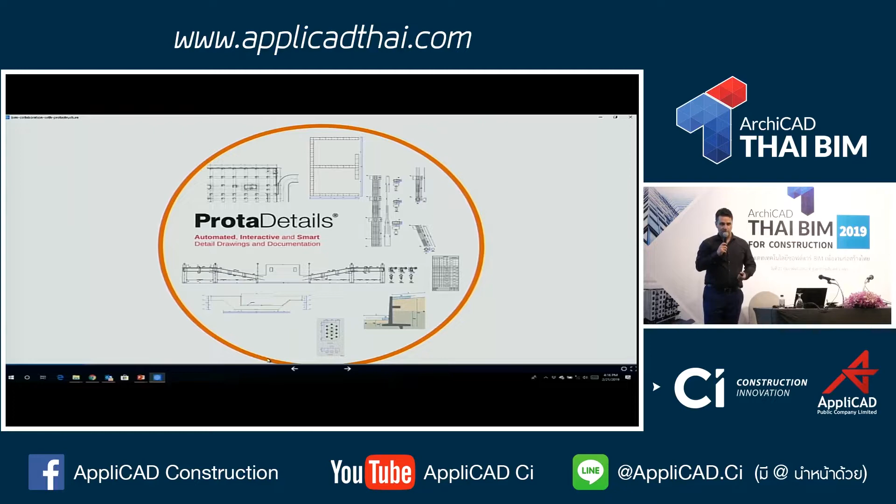Now, Prota Details works in DWG, but you can publish to other recognised CAD formats. We recognise that steelwork is a little bit different, which is why we've also created something dedicated for dealing with steelwork detailing, which is Prota Steel.

So the idea with Prota Steel is that once you've designed the structure in Prota Structure, you send it to Prota Steel. We can then automate the connection design and start to produce all the steelwork detailing, right down to connection details.

Now, let's not forget BIM, and I know that BIM's a very hot topic around the world, and we communicate our models directly with other leading platforms, including systems like Revit and ArchiCAD.

To do that, we have things like bidirectional round tripping, and we can take models back and forward to manage the process of changes and refinement to the models as you move them from design to construction.

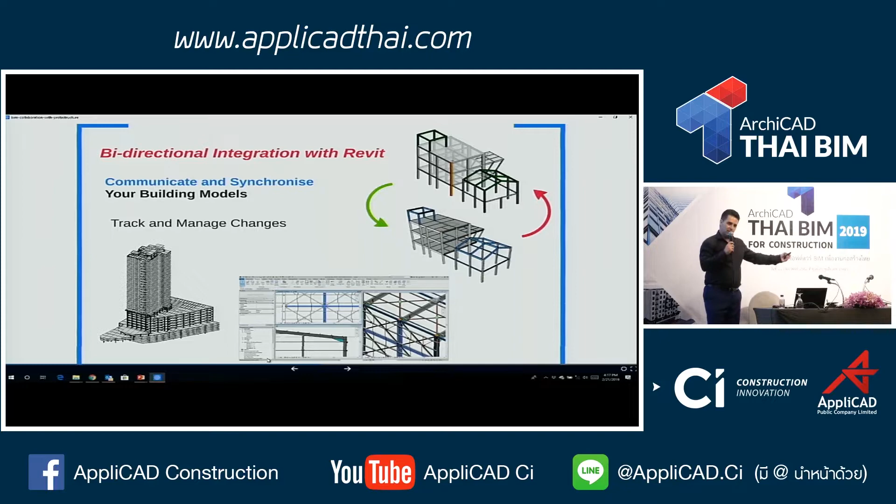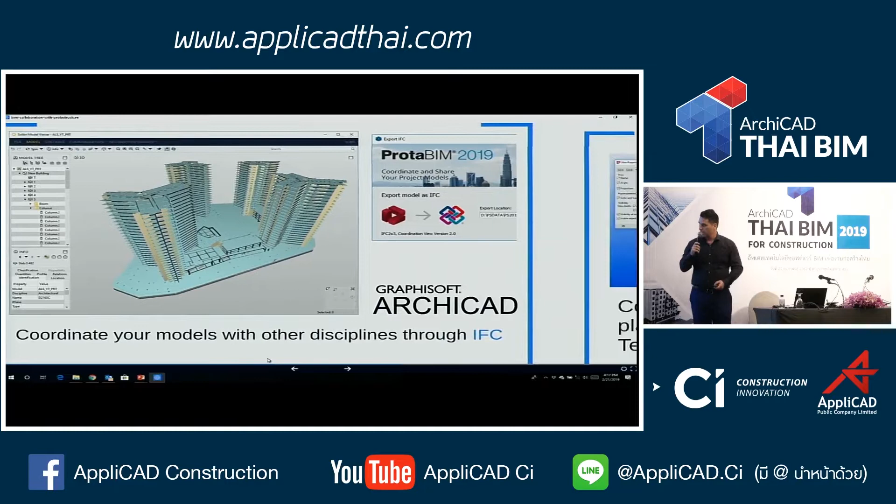We support a range of different formats, so if you're wanting to use IFCs, for example, we can publish those directly into ArchiCAD. We do work with other platforms like Tekla, ProSteel.

We can even go down to shop drawing production, and NC files and so on can be generated from our systems to feed fabrication.

Now, we're very open, so we make it easy for you to share information with other platforms, including general analysis systems like SAP, ETABS and LUSAS. So if you want to cross-check models from Prota Structure, we make those available to you, and you can easily cross-check results from our systems with other recognised platforms.

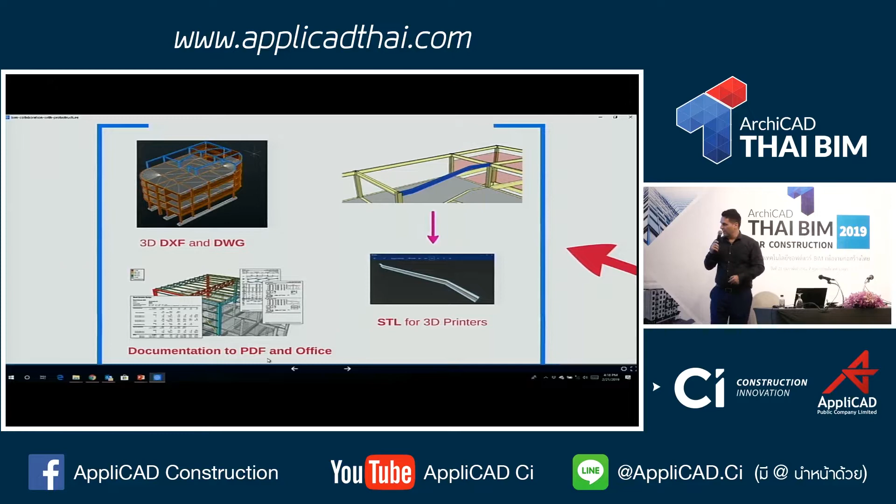Now, there's other formats as well that you would need to produce as an engineer. Obviously, things like calculation documentation. All the design that comes out of our system is fully documented, and all the detailed calculations are produced. You can also provide other formats like 3D DXFs, even down to STL files for printing.

Okay, so this gives you an overview of our system. Now, what I'm going to do at this point is sit down—you'll have to excuse me—and I'm actually going to show you how it works. I'm going to take you through a simple model to give you an idea of what we do at Prota.

Can you hear me? Is it clear?

So what I'm going to do here is take you through how the software works, and to do that I'm just going to build up a simple model. When you start Prota Structure, if you're new to it, there are quick start guides, YouTube videos, and tools in here to help you get up and running with the software quickly. Now we have regular updates to the software and they're all documented.

Now what I'm going to do here is create a simple model. To do that, we'll just give this a name, so I might call this a Bangkok presentation. We have studied different markets around the world, and we've got different templates here that you can load. So for Thailand, you're typically using the American codes here, and you can load these templates which will customize the way in which the design and the detailing is prepared.

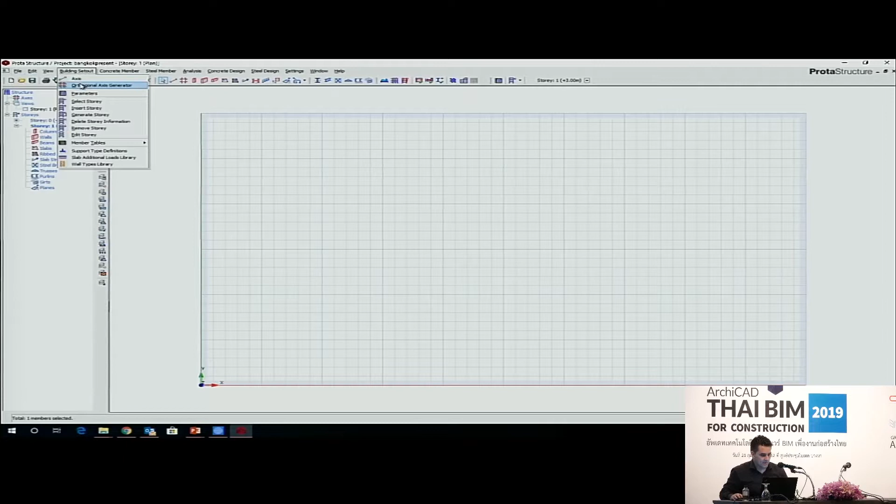I'm just going to create something simple here to give you an idea of how this works. So I'm going to key in a basic grid line arrangement, and maybe a few axes here, and if I just hit OK, you can see that some grid lines have been set up. Now these grid lines are dynamic, and we use these to help us with the set out. So what you're going to see as I go is that this starts to look like a key plan.

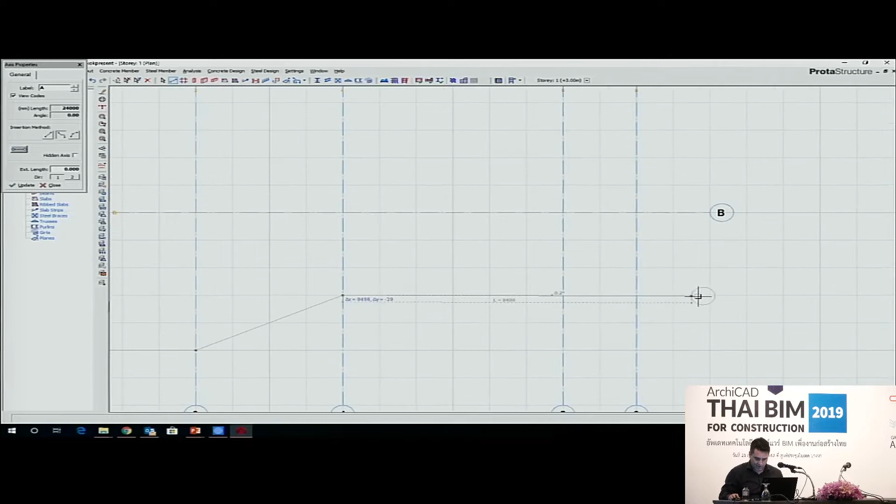But the grid lines are dynamic, you can make changes to them. If you want to make a curved axis, for example, or maybe you've got a building where the facade's a little bit different and you want to set things out differently, you can just come in here and draw out what you want. Any funny arrangement you can create here, and use those grid lines for set out.

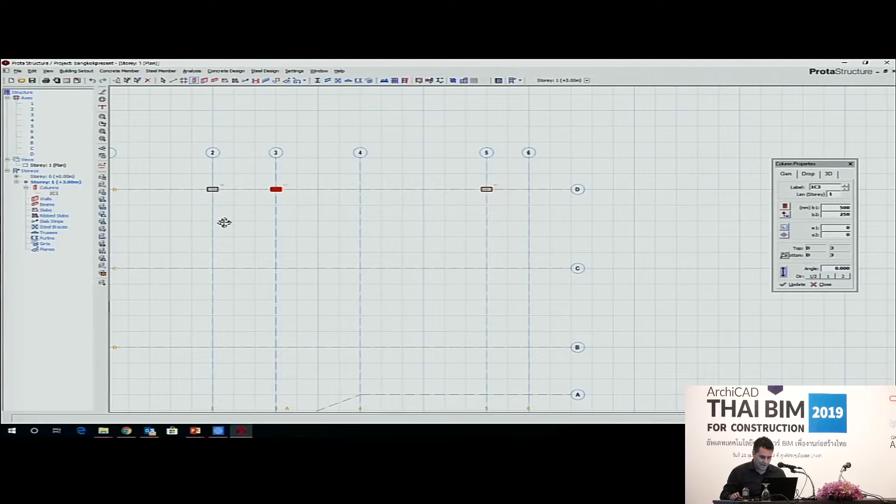Now I'm going to work with physical objects, and you'll see here that I have selected a column, and you can see the preview of the column shape. So if I want to create that column, I can just click to put it in. If I have multiple columns that are the same, I can just click and box around. If I want to change the orientation of the column, maybe I'd like it in a different direction, I can just box around and create those quickly.

There are other objects that you can work with in here. You can work with different concrete or steel or built-up sections, cold form sections, even composite sections, you can create in the model here quickly. If I want to maybe put in a couple more columns down the bottom here, maybe I've got another one there, I can just quickly set those up.

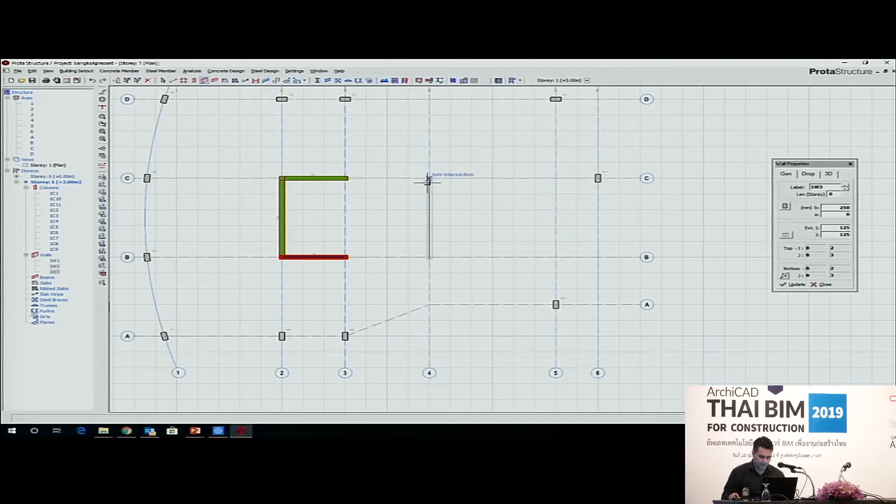Now I'm going to move in and put some walls in. I'm just clicking to create these walls. At the same time, I'm also going to create some beams.

Now you can play with the properties of the beams here. You can feed in the depth of the members. You can box around to put these in, and you can start to see that I'm now starting to create the shape. Even if it cranks and follows the curvature of that beam, that grid line, maybe I want to put in a curved member. The idea is that I can just quickly come in and create the structure.

Now if you have lots of members in an area, you can just simply box around and they'll be created there. If I've got members through, we understand that these members already exist, so there's no overlapping, there's no double counting. It's just putting those two extra members in.

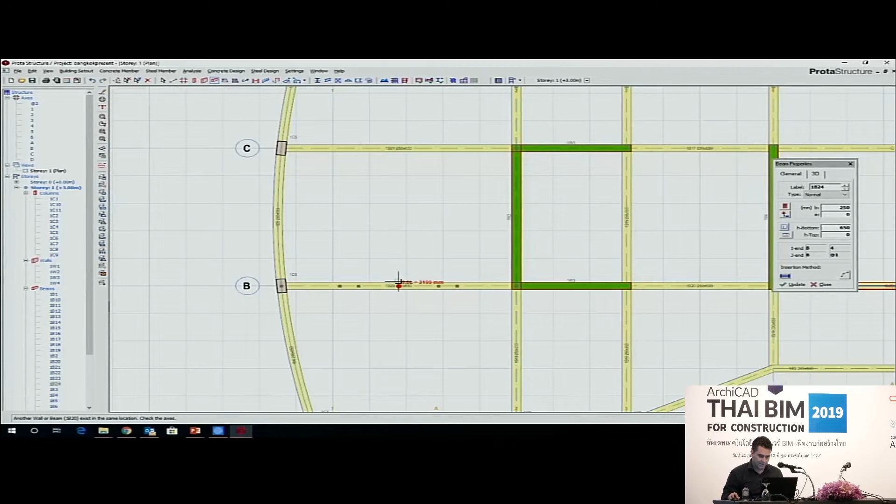Secondary beams you can just easily select and put members in very quickly. Now if you have certain set out, you can just key in a distance, and then it will pick that point up and you get handy points like the perpendicular. You can move these around to then adjust it to suit the architecture.

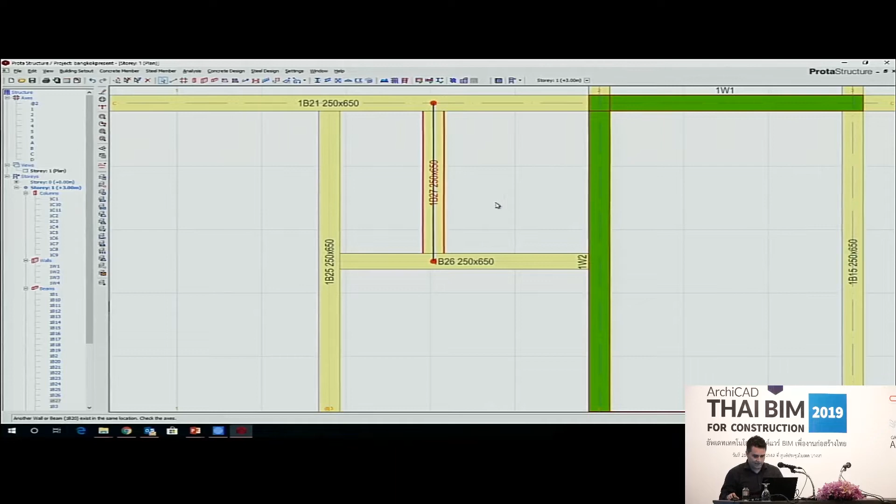So if I wanted to move it either way or just move it roughly into position, I can. It could be a single element. Maybe over here you'll see that I've got a number of columns that are just jutting out from the facade, and I may just want to pick these up and move them. So you can easily just adapt the model to suit what we want to create.

Now, at this point, I'm going to put some slabs in. Let's just assume that the slab is 200 thick. Now, the self-weight's calculated. You can have libraries of different finishes that you can draw upon. For live loading, if you're not sure, the code is in here, so you can just choose from different values in the code, and then quickly come and insert and create your slabs.

Now, you can edit these. These values are editable. You can just type in the loading values that you want to use. They can be whatever values you wish, and you can just quickly come and create the slabs there. Maybe that's 3, and you can put that in.

Now, what you might see here is that we're automatically working out the yield line for that slab. So underneath this, even as we speak, all the loading's automatically being distributed.

Can't hear. Okay, sorry, all right, I'll get this a bit closer. Is that better? Okay, all right.

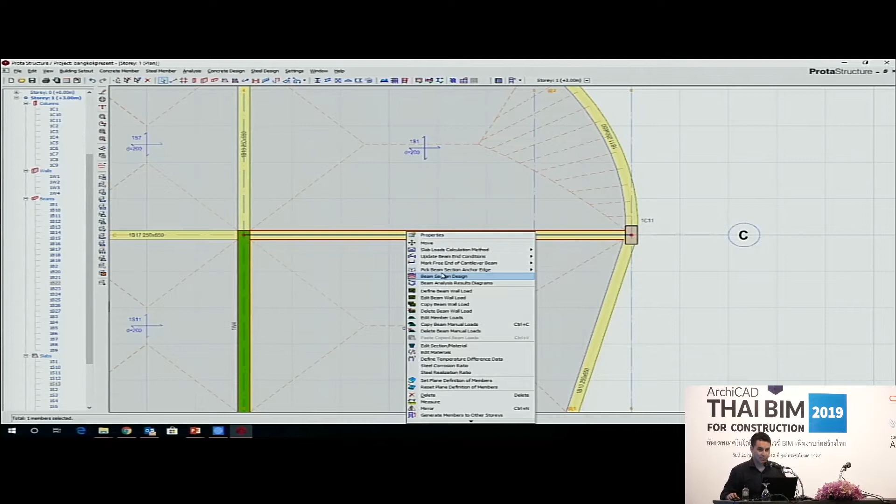So what you might see here is that I've got the distribution of dead and live loads automatically being carried out as we speak. So all this is handled automatically. You can use finite element analysis to distribute loads if you wish. Now you can have different types of objects in here.

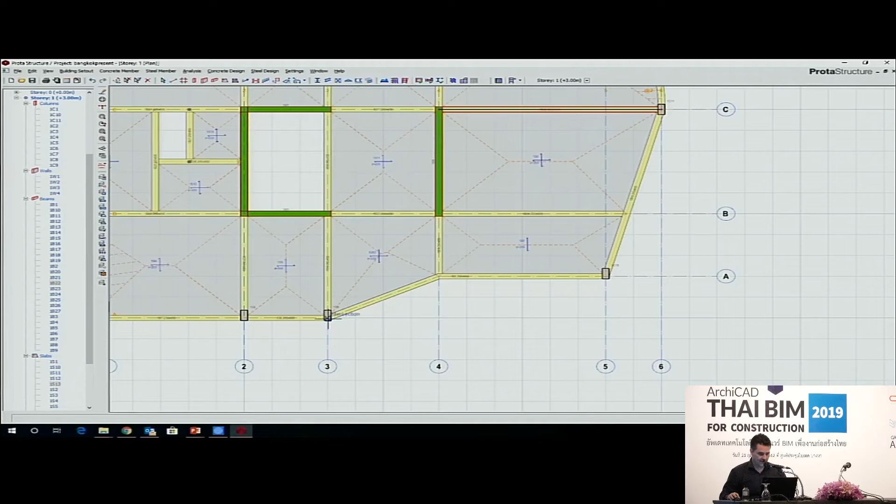So if I wanted to create a slab which is a bit different, we can draw out the profile of what we would like to create, then take another slab and come and create this. So I might have a slab that's maybe only 150 thick, and I want to drop the slab 100 millimeters. I may want to just change the way in which this is orientated in the model. So these things can be controlled, and then we can use that profile to help us create that unusual balcony.

Now, what you might not realise is that while I've been building this model, we've actually been creating simultaneously a 3D model. This is the underlying 3D model that has been driven from us working out that set out, and you can work in both 2D as well as 3D in the system.

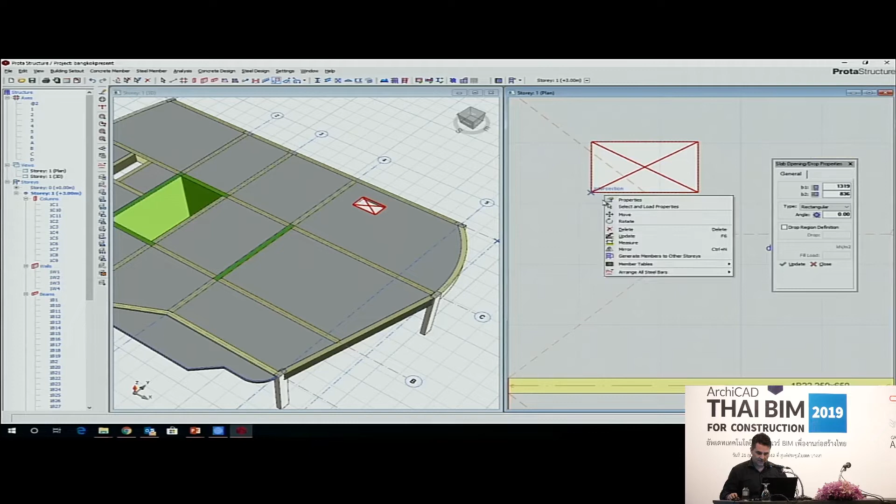And the beauty of it too is that you can lay out other things, like maybe you've got things like openings in the model you wanted to have for services. The advantage with the 3D model is that if I got that position wrong, I can just pick up the opening and move it.

There may be other things that you want to set out. You may have unusual drops and so on in the slab. Maybe you have a bathroom and you've got a set down. So in here I can just draw that out, and you can see that that's been created in the model.

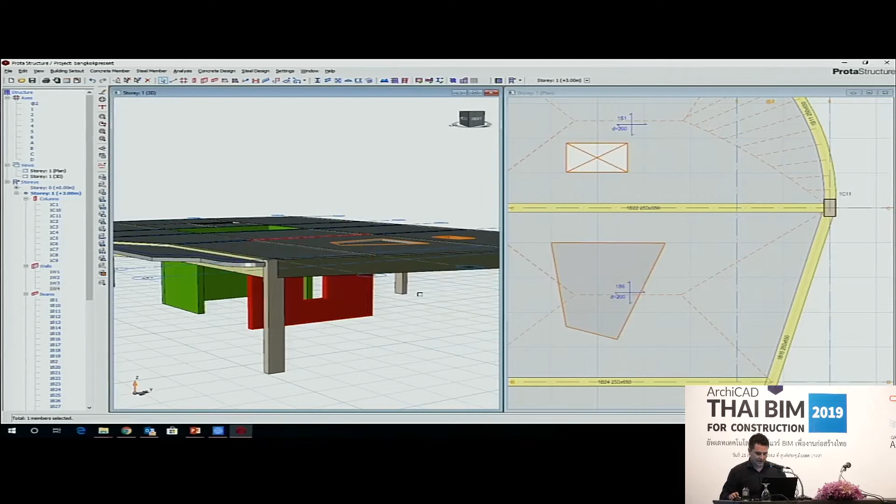Other things like maybe if I come and select this wall here, we may like to include, say, a door opening or something like that. So I can come and put in openings in here. You can key in parameters for say a door, for example, and you can position it where you like. If you hit OK, then that door's created and that opening's then created in the model.

The idea is that you can very quickly come and set these out. If you have other things you want to put in, like wall loading for beams, you can have libraries for different types of block work, key in the value of the wall loading, and that will be created on the beam.

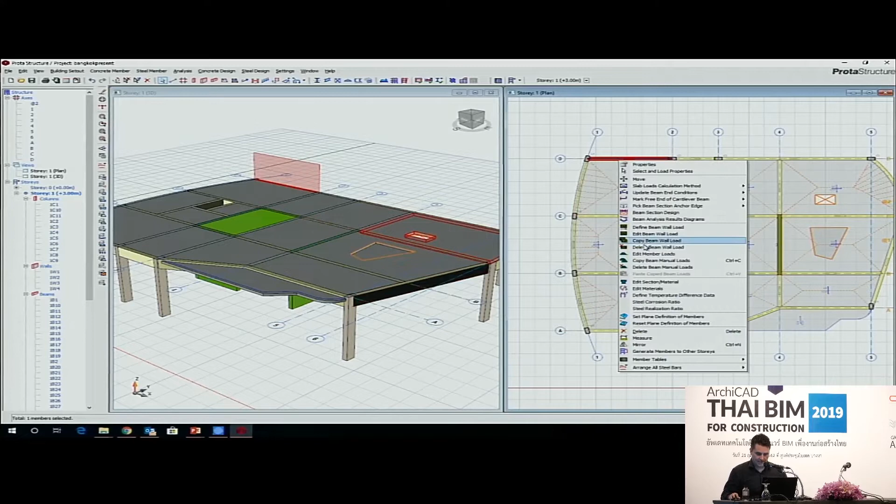These can easily be copied and replicated around the model. So if I wanted to quickly set up the wall loading around the perimeter of that building, we can just copy and paste that, and you can see those loads have been quickly set out.

At this point, I'm going to start to generate information. This might be a typical floor - maybe this is a 5-story high building. I can take this floor and copy it up the model, hit OK, and you can see this 3D model is now starting to be prepared.

This I can work with in 3D - it's editable, and if I want to make changes as I go, I can. Maybe there are other types of structural systems we want to consider.

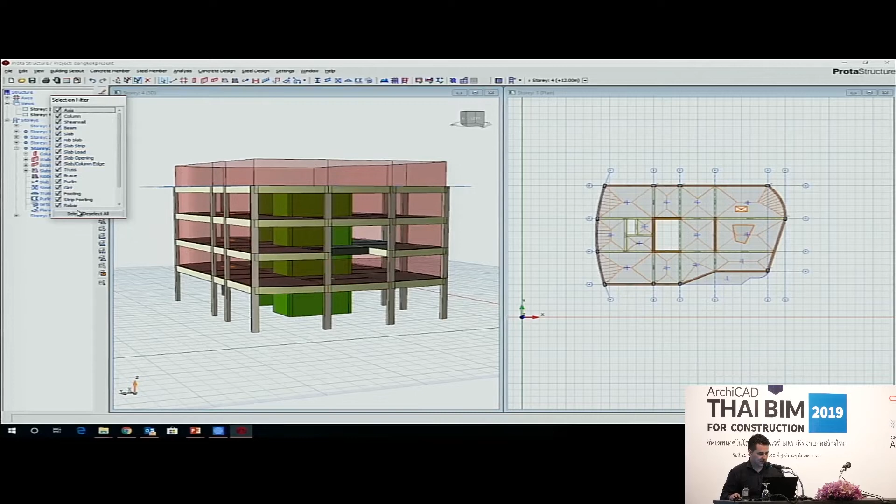I may select the beams at the roof and actually remove them, so now I'm just left with a flat slab system at the roof. We can easily come and adapt the model to suit.

If you want to make other changes, you can. So if I decided I wanted to remove the wall there, I could take that out. Over here at the moment I've got a column - maybe I'd like to make it a square column. We could just come and change the properties here to suit.

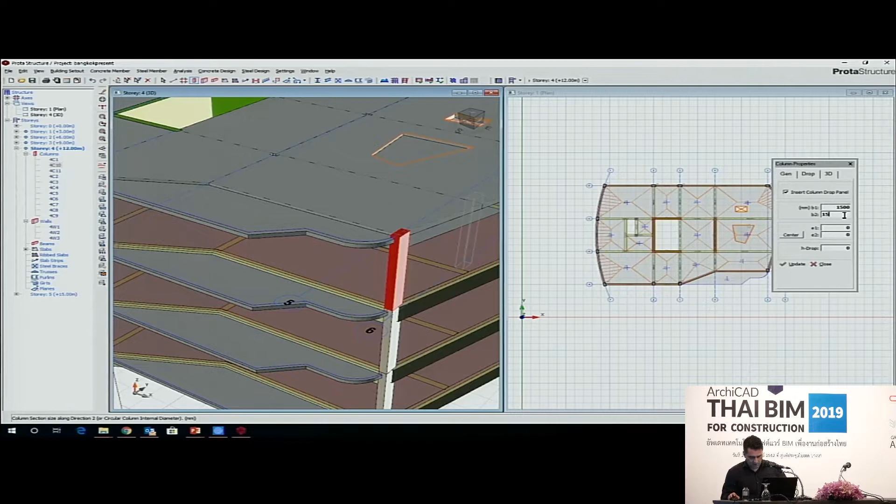I might want this to be centroid, and then I could come and insert a drop head panel. You've got different types of elements to work with to suit what you're trying to achieve in the structure. If I reposition that in the model, you can see now we've got a drop head panel for the flat slab.

It just depends on what you're wanting to do as to how you might go about creating this. Now let's go to the roof and start to work with some steel work. If you click on the model, you've got different section properties to choose from - maybe put in a column as a starting point, then choose a section you'd like to work with, and start to develop this.

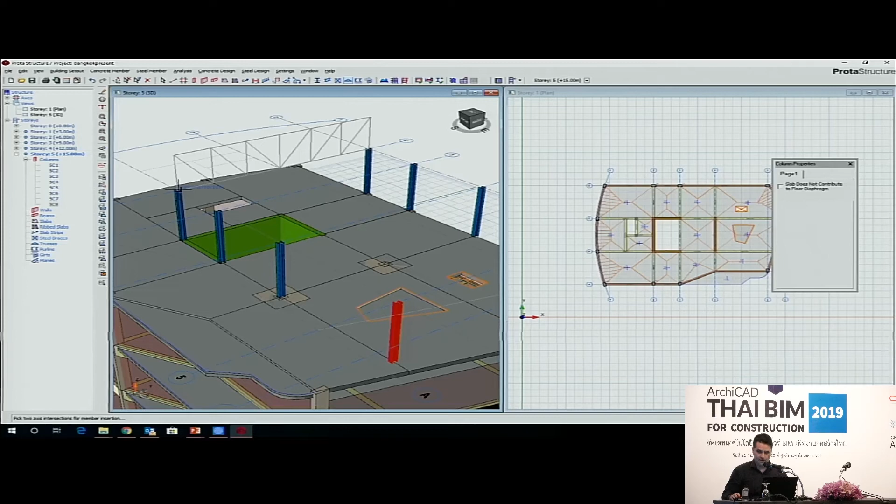I'm just putting in some columns there, quickly set out. If you then want to create a truss, I can just quickly insert the truss - you've got different types of truss systems to choose from. This is all flexible, set out and controlled here, and you've got a little 3D model you can preview.

What you can do is start to work with this. So if I wanted to change, maybe I want back-to-back angles for my internals, or maybe I'd like to use tubular sections or so on - all this can be edited to suit.

Now I'm going to remove the two verticals there and place this in the model. So you see that truss has now been set up, and we can work with that truss, and quickly replicate it across the building.

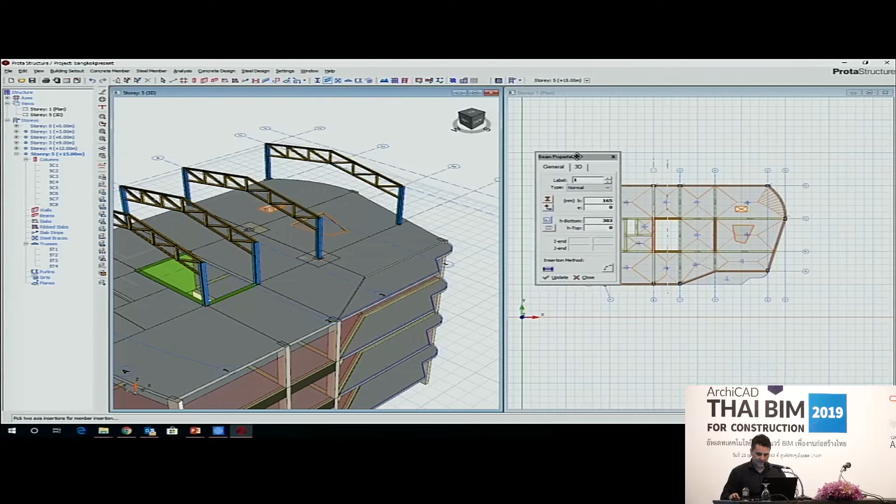Now I may also want, at the same time - let me just close this window so you can see what I'm doing - to come in and put in a beam, so it could be a UB, and we can just choose a size as a starting point.

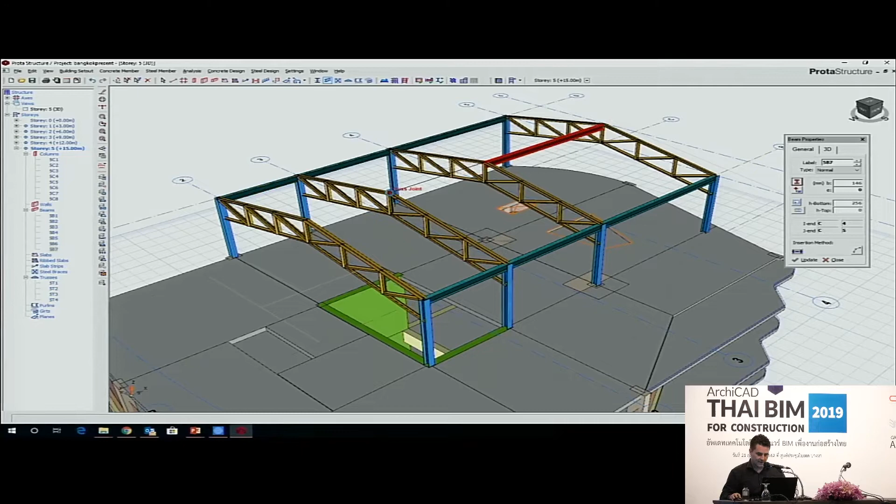I'm going to pin the ends of those beams, and set out those members across the perimeter to tie those frames together. I'm going to connect the apex here - these are intelligent snap points, so you can snap to virtually anywhere, but let's just tie those tops together.

Now, laying out things like purlins can be a bit of a challenge. So here you can just choose the end bays, and it will propose a purlin arrangement. If you want to change this, maybe put in a cold form section, or a normal hot rolled steel section, you can choose from different sections here. I'll just edit that again.

So maybe I want to choose a bigger section, we can come and select that. Now you can also assign, you've got sag rods in there that we've provided. If you want to remove them, they don't need to be there, it's up to you.

You can also add loading, so I may have my cladding that I'd like to set up in here. We can then come and assign that to the model, and you can see the loading's been automatically distributed to the purlins. If I hit OK, our purlins are just set up.

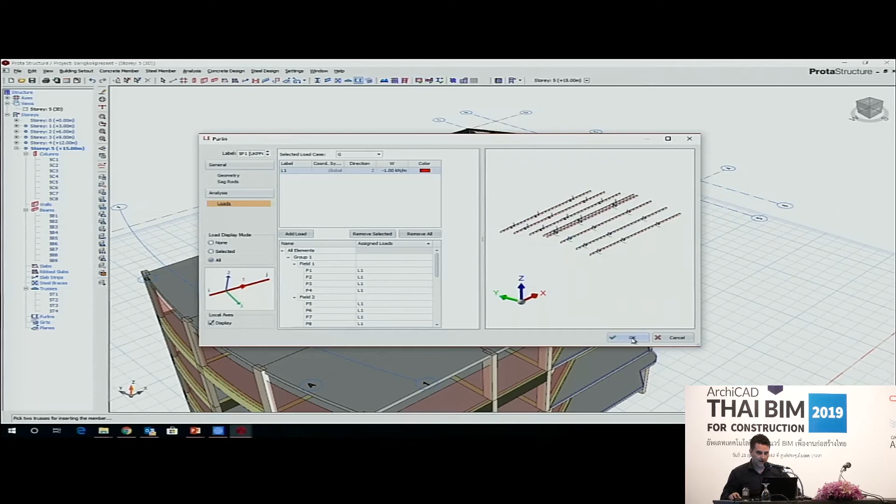The final thing I'm going to do here is put in a bit of bracing. So we can just choose a couple of planes, and there's different types of braces you can choose from here, V brace, K braces and so on. If you just hit OK, the brace is created. So you can see here, very quickly, I'm working with the physical model to create our design model. Let's just come and pick that up, and we've got our bracing system done.

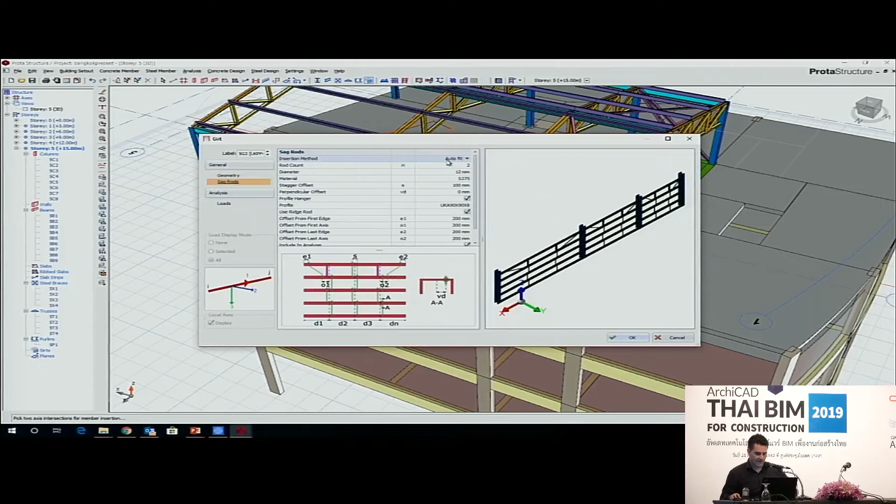The last thing I'll do to finish this model off is define some girts. So I can choose two end columns there, and it will propose a girt arrangement. You can play with the spacing of these. Again, if I don't want to see the sag rods, I could turn those off if I don't want them in the model, and then they can be created there.

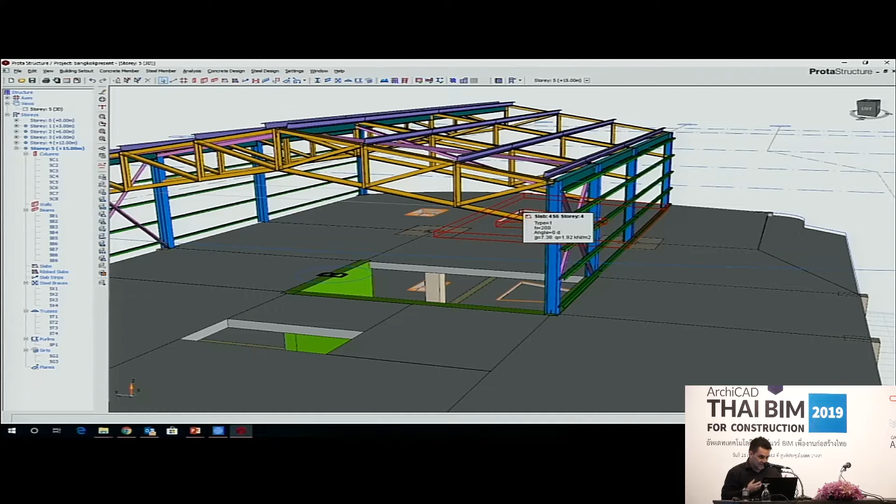Now the important thing to note with what I've done here is that we're setting out everything physically as if you might build it. That's very important, because from this model we're now going to start moving into design, and then we're going to start creating drawings. So we set out the physical model to create what it is we want to actually draw at the end of the day. So I've done a basic model.

Let's move into looking at the analysis and design. I'm just going to save this project, and then we can move through the design process. Give me a second, let's grab some water.

So in the software here, there are different parameters that you can choose. There are different codes of practice, as I mentioned earlier. If you're doing projects elsewhere, you may want to design to Eurocode or British standards or other codes of practice. You can just choose from here. We've set this up to suit how you do things here in Thailand.

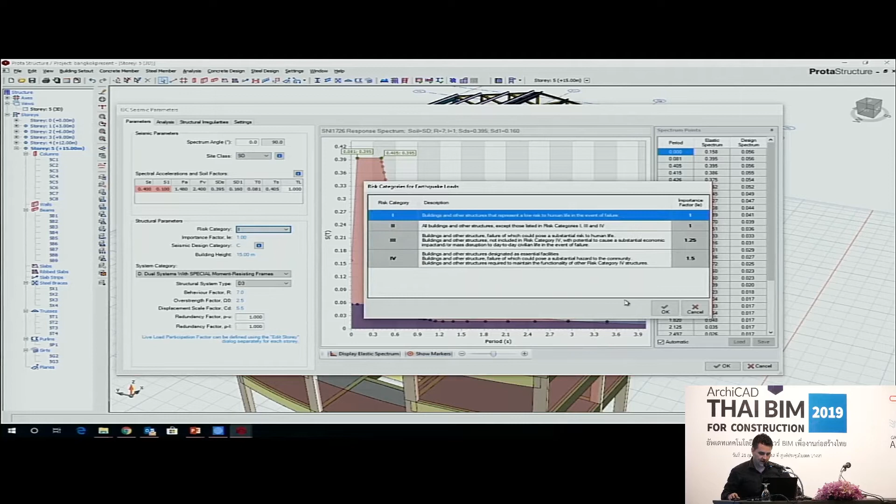You can also come and define your seismic parameters here. In Bangkok, I understand you're on medium soil, so you'd choose the soil class for setting up your seismic loading. You can choose different risk categories for your building structures. You can also come and define different structural systems, so I might have an intermediate moment resisting frame, or it could be ordinary RC walls. It will adapt the spectral curve and design accordingly.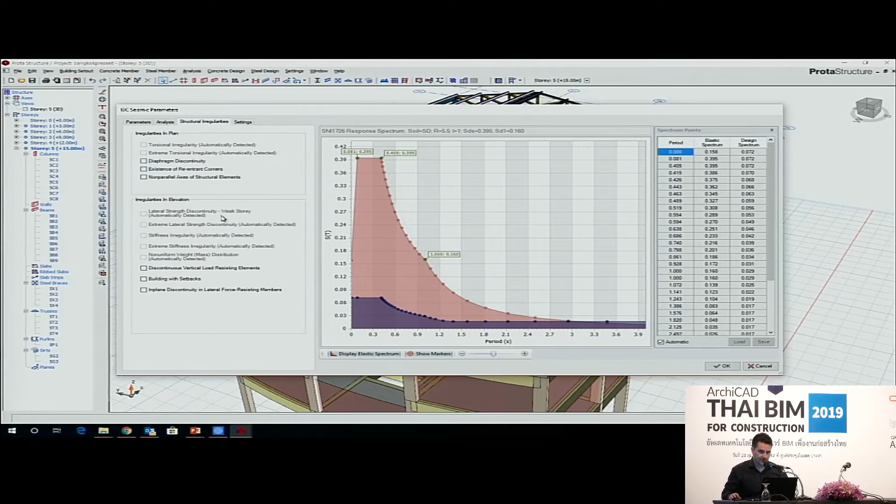You can play with the number of modes that you can consider. We also can check for irregularities. There's some quite sophisticated things that we do here with the seismic design.

Load combinations can be difficult, but in here we actually set these up for you. So all the pattern loading, stage construction analysis we can run. Lateral cases for seismic can be established here, and you can choose—maybe you don't want to use vertical earthquake, for example—and just look at a smaller number of cases. Wind loading and so on can be created.

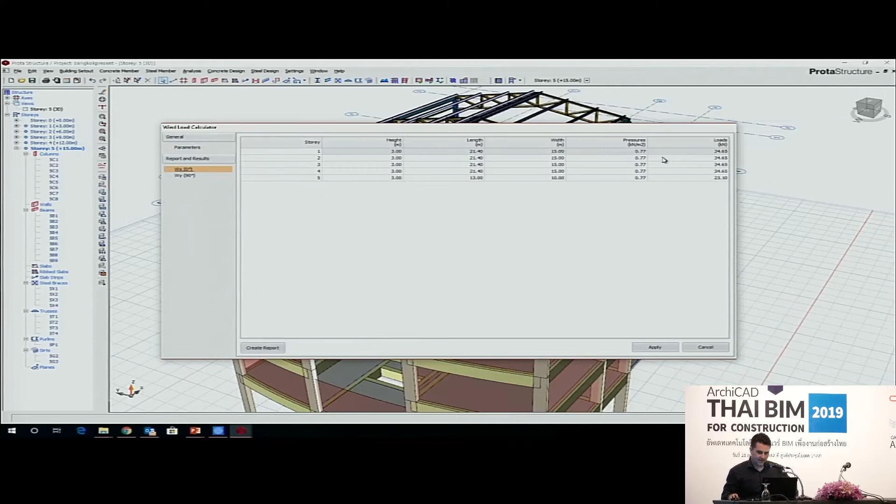Now the beauty of this is that I can set all these analyses up and run them simultaneously. So stage construction analysis, P-delta, dynamic analysis are all run in one go, and all the combinations have been set up automatically. Now wind loading, again, is very simple—you can just put in your basic wind speed. I'm doing this to the American code, and then we will automatically calculate the pressures and the loading for you, and this will be assigned to the structure. So within a few seconds, I've created all my load combinations, set up my seismic and wind loading, and I'm now ready to go.

Now you can play with the grades of concrete, material grades can be played with here. You can also set up your preferences for design, bar sizes and grades of steel and so on can be set here.

Now I'm going to move into analysis and design. I'm going to choose to mesh my walls, and I can come and choose to mesh certain slabs in the model, so I'm going to mesh the fourth floor. I can play with stiffness properties and so on, which can be manipulated here to suit.

Now analysis is just a button, and once we've done this, we can move into running the analysis and design. So I'm just going to hit go.

What we're now doing is taking that physical model and automatically working out the analysis model. The model does checks as this is progressing, and it's now creating the underlying analysis wire and performing the analysis. The advantage of working with physical objects is that as we go, we're actually starting to build the analysis wire as we develop the model.

So the analysis is very fast. In fact, we use a sparse solver to give you very quick analysis results. This model has about 27 different combinations and variations that we're setting up, and I think it's nearly done. You'll see that the analysis will be finished in a second.

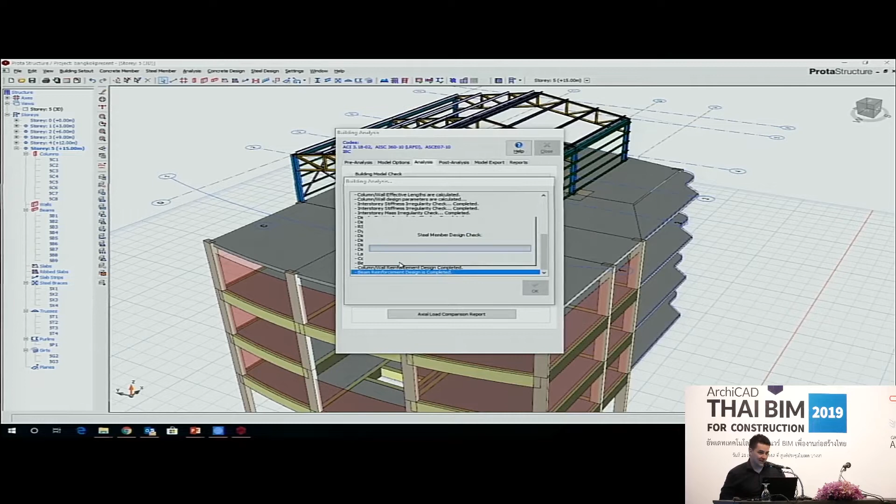Now, you may find that during the course of a job there are changes. Once you've done the design in here, we actually keep all the design, so all the steel, all the reinforcing is kept. Later on you have the option to do check design, so you can check the existing design you've completed against the changes made, and the software will highlight those members that may need to be redesigned. We have features in here that will help you manage and maintain changes in the model.

Sorry, this is a bit slower than normal. I think it's just my laptop, and also that I'm running a few applications there. Let's give it a second, and we'll be finished.

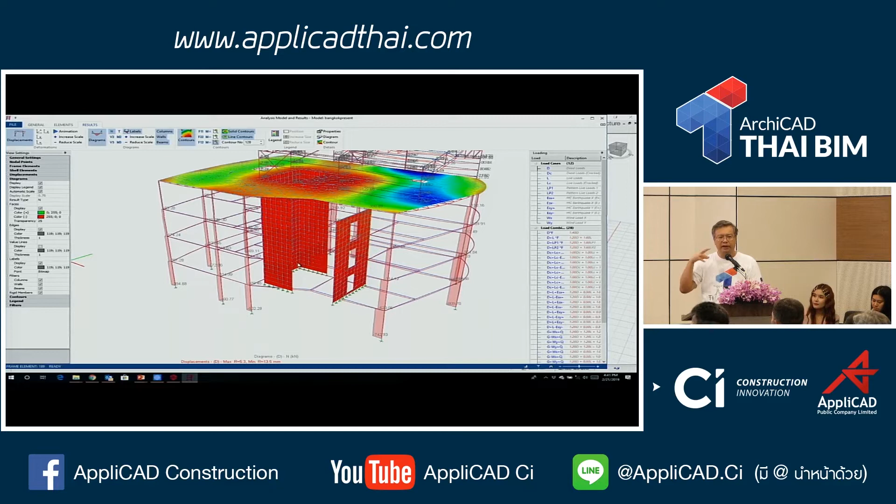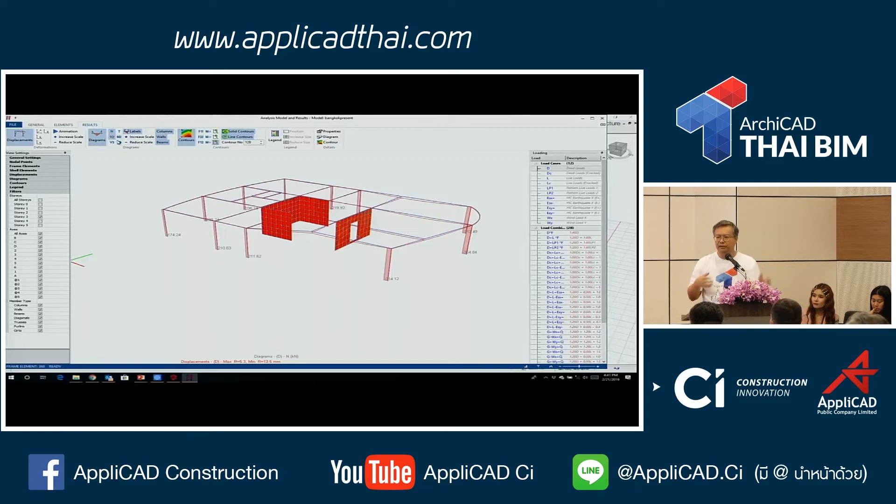Okay, right. Thank you.

The results have come out. So what I was just doing while Samsak was talking is I showed you the analysis results. All the analysis you can interrogate, you can see all the different combinations, load cases, dynamic effects are all shown here. Think of this a little bit like SAP or STAAD. You're able to interrogate all the results.

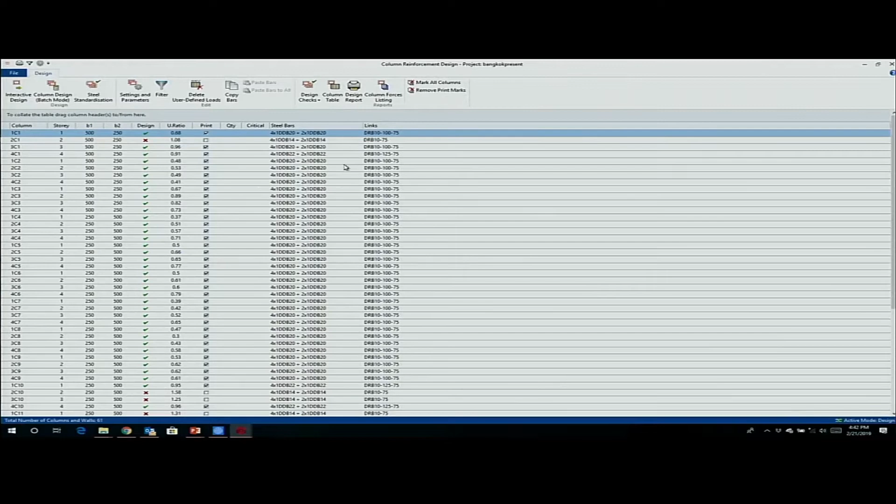But what we've also done at the same time is we've actually come in and designed this. So you can click on a column and see the design. All the detailed design checks are being performed. There are design reports in here that you can view to see how that's being done. You can also look at things like interaction diagrams. All these are shown. You can also look at loading results and so on, and here it can be indicated, for example for a column.

If I come to the beams, similarly the beams have been designed. I can select the beam here. You can see a basic schematic of the detail. You can look at your envelope diagrams. All these are being produced, all the different cases and combinations. And then under this, there's the design being done.

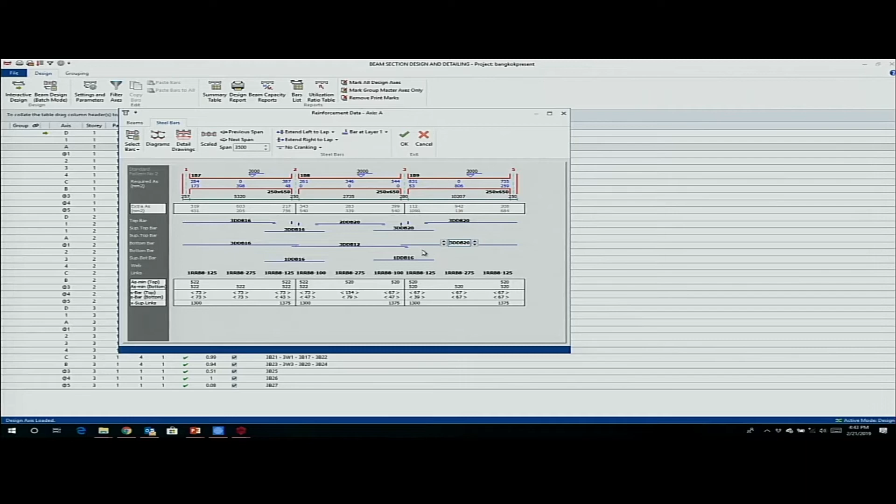Now if I change this, can you see that this has now failed, because we have automated the design and it's dynamic, and you can make changes to the detailing design if you wish. Underneath this though, what we are doing is producing a little drawing, so you can see a schematic of what you're going to create before it gets created.

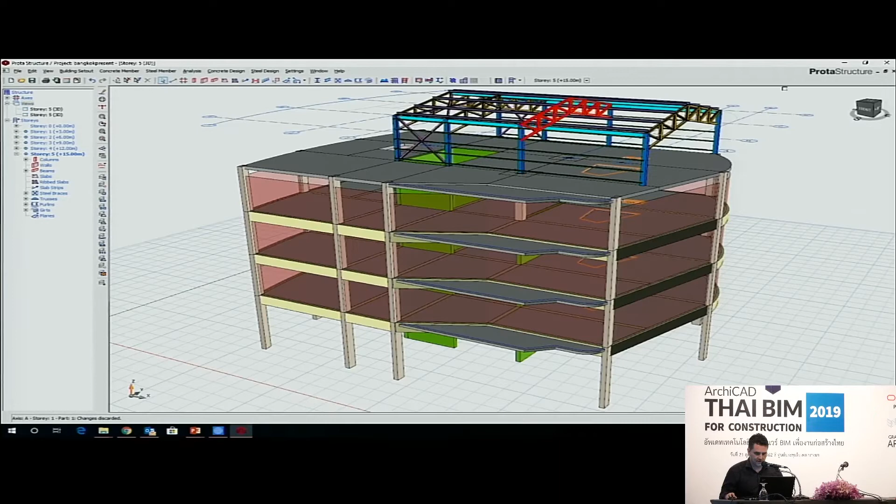Now I could carry on and look at other aspects of the design, but to finish here I just want to show you... let me turn off one of these and show you a plan view.

The final thing I'm going to show you in this model is how we deal with other things like foundations. If I come down to the bottom here, you can see I have a foundation view. I can select columns and choose to insert pad bases or pile caps, for example.

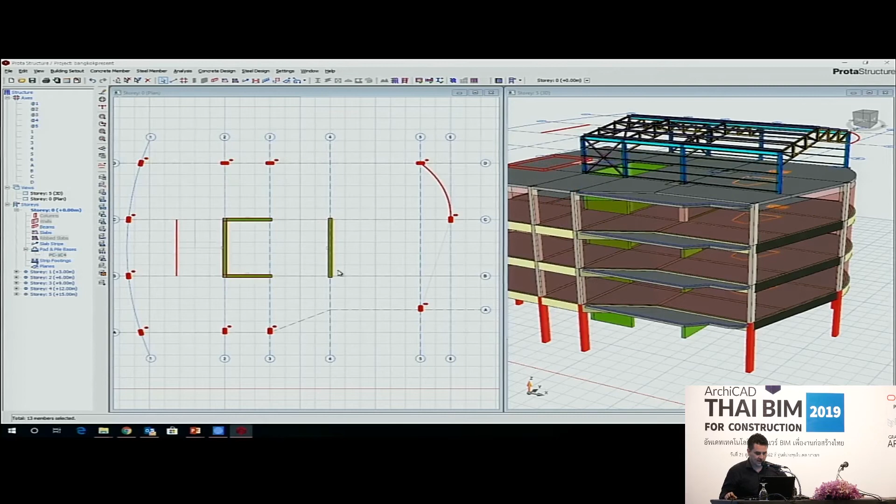I'm going to set some pile caps up here. Allowable working loads and so on for piles can be input, and then we batch design these in one go. We can group these, and if I hit OK, you can see all the pile caps are now designed and produced.

There's a range of different foundation systems in here, depending on what you want to do. If you're doing raft foundations, piled rafts, strip footings, or pad footings, these can all be easily created in the model. I've just set out a raft here, which I could mesh and move into the design if I want to.

At this point, I'm going to start to create my documentation. So I'm going to move into Prota Details to start looking at my concrete detailing, and I'm also going to show you Prota Steel.

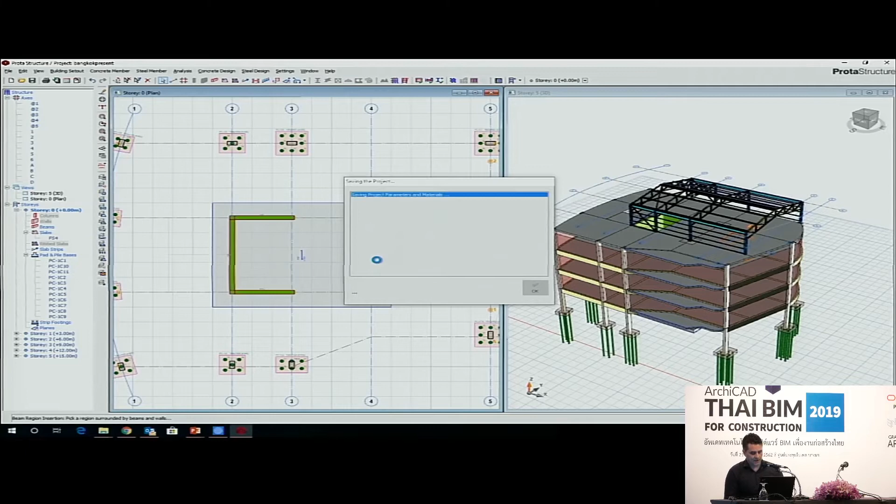It's now going to open up the Prota Details application. I hope that gives you an idea of how this works and how quickly you can work with models to develop them. At this point, I'm now going to move in and start to create our drawings.

It's just loading Prota Details. You can see it's loading in the background there, and then I can bring this to the front.

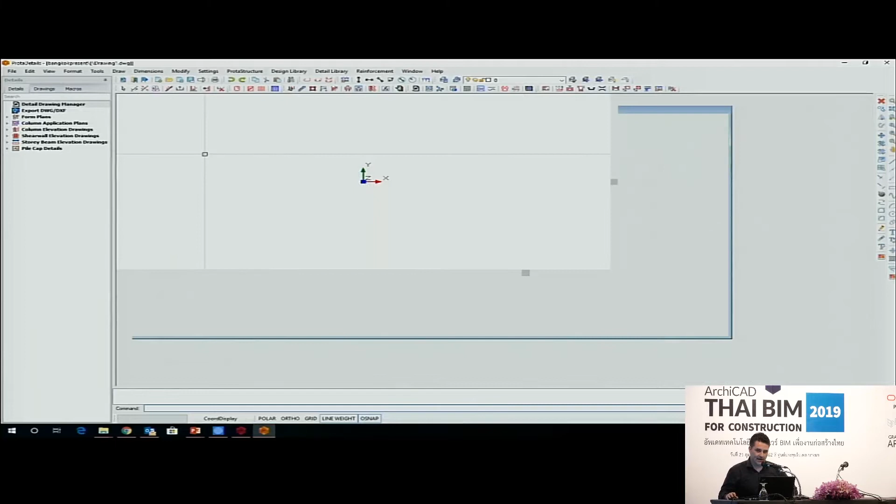Now I'm going to ask it to automatically come in and create my drawings for me. I can choose what I want to draw here, such as form plans, column elevations, beam elevations, foundations, and so on. I can choose to insert this to a sheet, and you can choose your title block, which would be your standard company title block. There are different preferences you can set in here.

Maybe, for example, I want to truncate the beams in a certain way. I can play with scales in here, and line types and layers can all be worked with. But the idea is once you've done this, I then want to create all of our drawings.

It's now going to move through and batch produce these drawings in one go. So it's drawing this up, and you can see that some of those drawings have already been created for you. It's finishing off now, and it's reasonably quick.

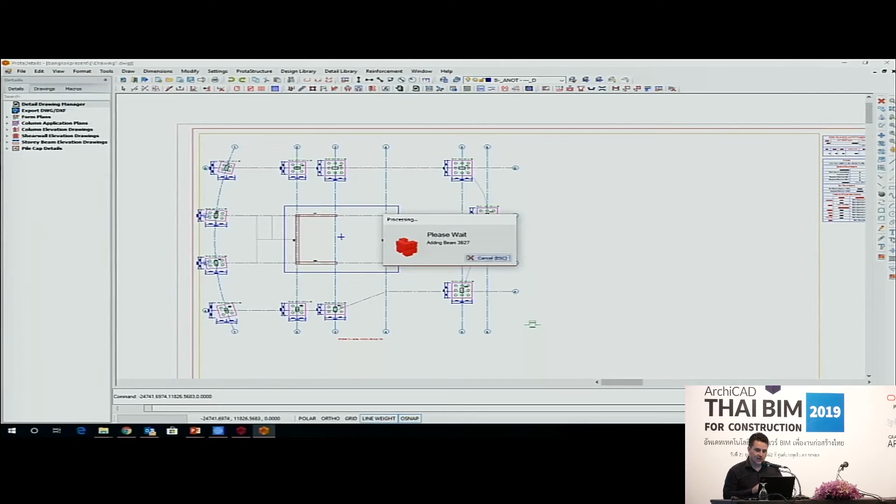Now Prota Details is a CAD system. It works in DWG, and you can draft in Prota Details as well. It's finished, and if I come out here, you can see all those drawings that have been created automatically from that model.

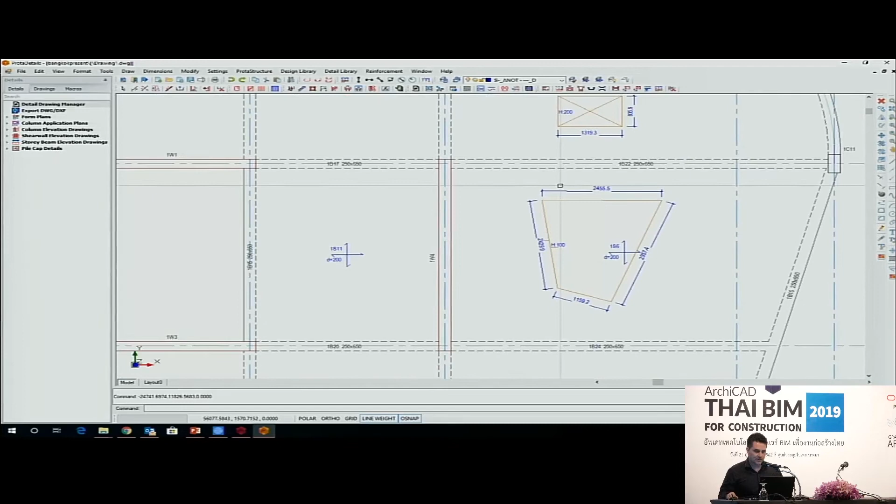If I come in here, you can see our foundation drawings, our foundation plan, and key plans here with openings and drops and so on indicated. This is your title block, which would set out and lay out into your sheets.

You also have other drawings like set-out plans against grid, so you can see where things would be constructed. Other information, such as the opening we had in that wall, shows the detailing that would be required around that opening.

You can also see things in elevation. Here you can see the columns, and you can see the confinement links that have been detailed for those columns. So you can draw those in elevation if you wish.

You can also show schedules, and we will automatically group the columns for you so it knows what's similar - all the grouping is done for you. You can see your wall details, and you can also see your beams here, showing the beam detailing we're providing. All that will be drawn out for you.

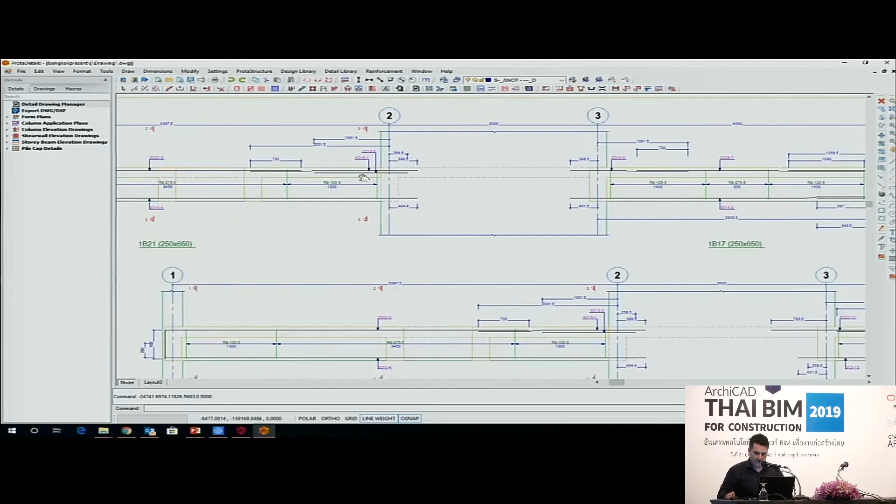What you may notice here is that these are 16 bars and it's positional mark 10. If you come over to the table here, there are 6 of those - 6.65 metres in total, and 39.9 metres altogether. That's the bar bending schedule for you.

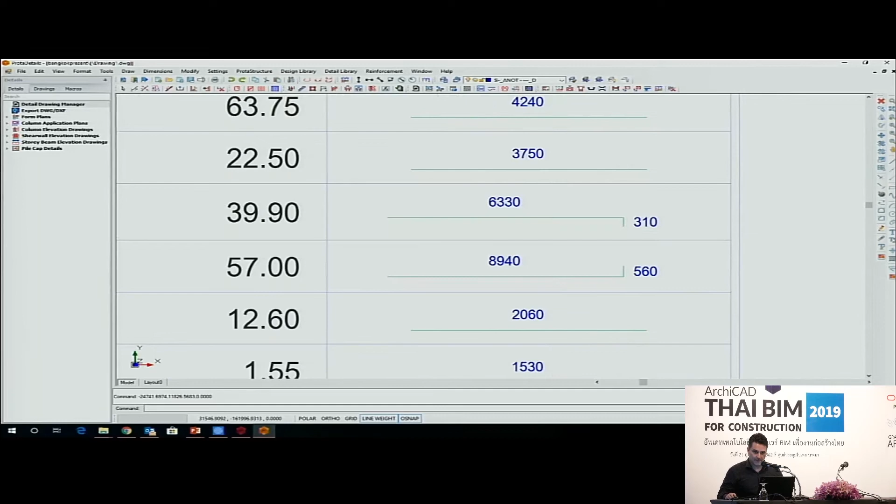Okay, now we know for this drawing there's 1951.8 kilograms of steel, so everything is being quantified here. Now these are objects and they're dynamic, so if I click on this, this is an object.

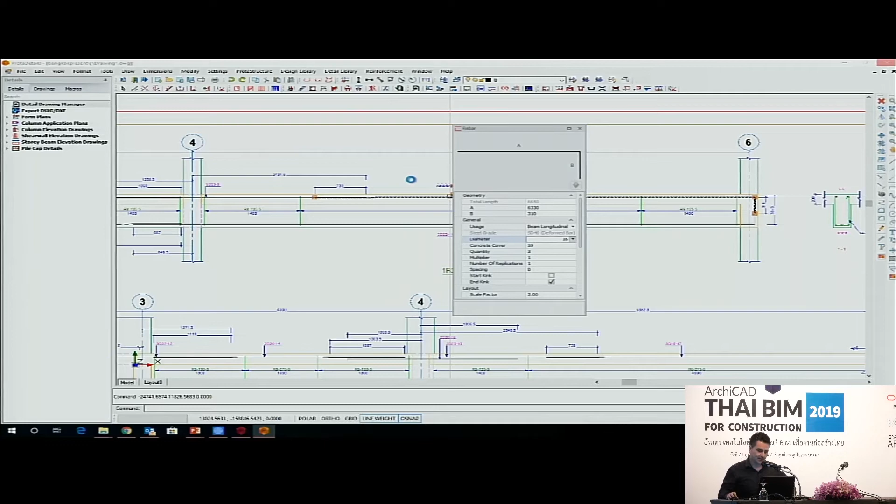I can change this bar if I want to. In here we can work with this to update the schedules. My computer's running a little slow, but you can see I've changed that. Simultaneously that's now a 22, and these quantities have been updated at the same time. So everything in here is dynamic.

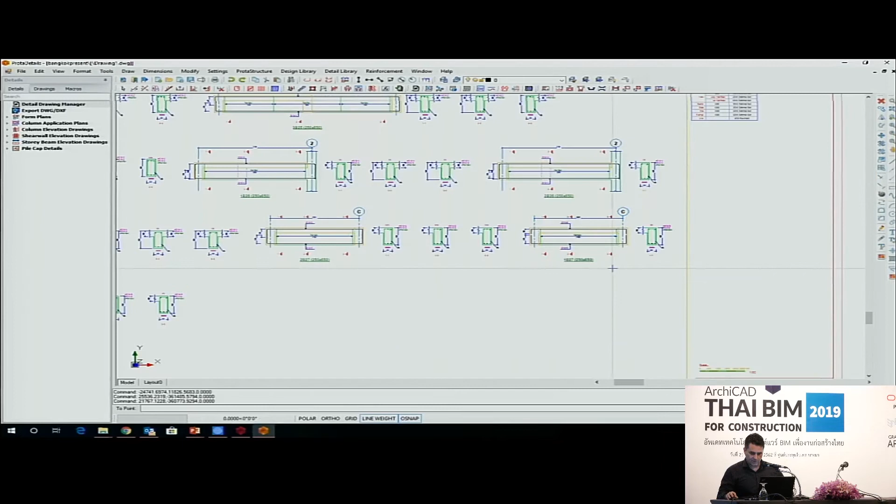All the drawing creation is dynamic, and you can work with it. Now, as I mentioned before, this is a CAD system, so if I want to change the detail, I can just come in and move things around. You're in CAD, you can do your own drafting in here as well, so you can come in here and draw up things if you want to add extra details. We have some tools in here that you can use to help you work with things like rebar.

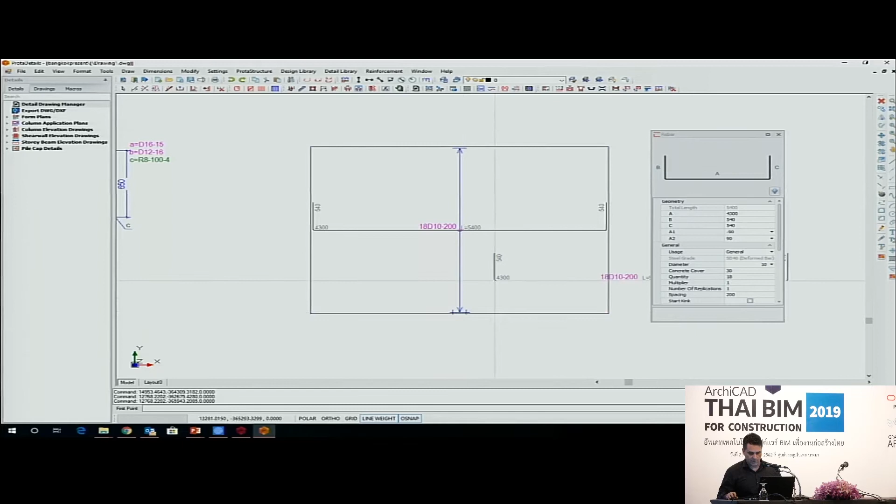So if I wanted to lay out a certain size rebar in the model here, then I can draw these in. Think of this like AutoCAD, and we've got a few tools that can help you with drafting that you can use.

There's other ways information can be presented. You can present it in schedules. Some markets quite like this because it saves the engineer time with having to draw everything out. You can come right down to looking at your foundation details as well, so all these can be drawn up.

Now there's other things in Prota Details which I'm not going to have time to show you today, but we have component design for things like retaining walls and pile caps and all sorts of things in here. But that gives you an idea of how Prota Details works.

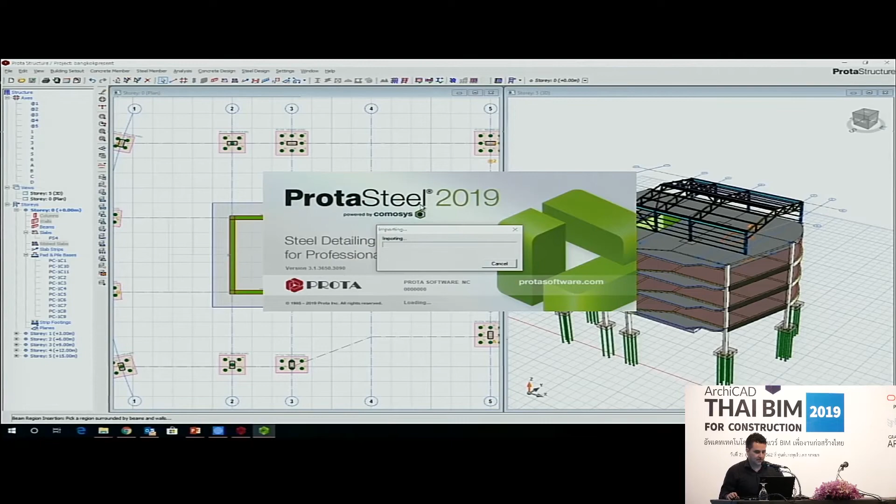And the final thing I'm going to touch on is Prota Steel. Now once I've done the steel design, I can then move into Prota Steel. I'm going to load this - it's just going to load up the system and bring the model into Prota Steel. Now once we've got the model in here, I can then move in to start to look at the steel connection design and detailing.

Now what you might notice along the top here is that there's a range of different types of connections that you can work with. So end connections, fin plates, moment joints, splice connections, gusset plates, welded joints, purlin connections - all of these are different types of connections that we can work with in Prota Steel.

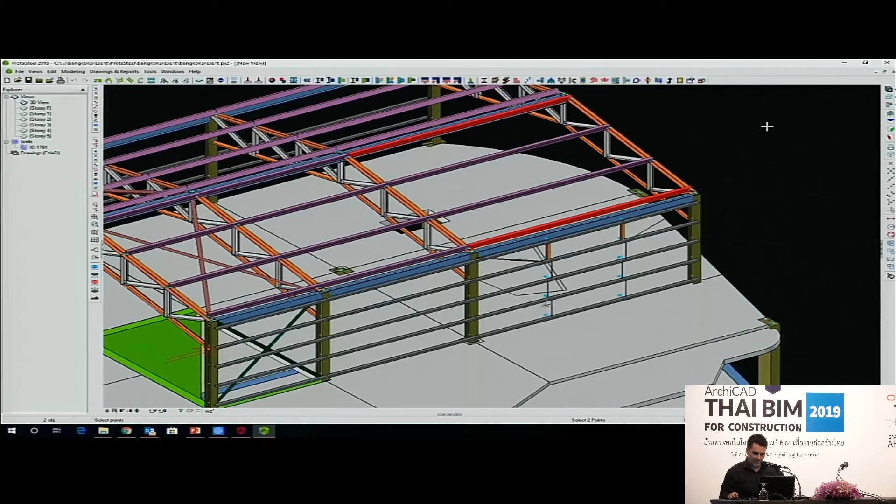And what I can do in here is start to work with creating things. So if I wanted to, for example, create some sag rods, I can just click and put these in the model, and the sag rods are then designed. If I choose maybe a purlin, I can just click and we can create a purlin connection there, and you can quickly come in and set these out. If I want to trim that sag rod, I can just come in and choose the relevant connection and it will be done.

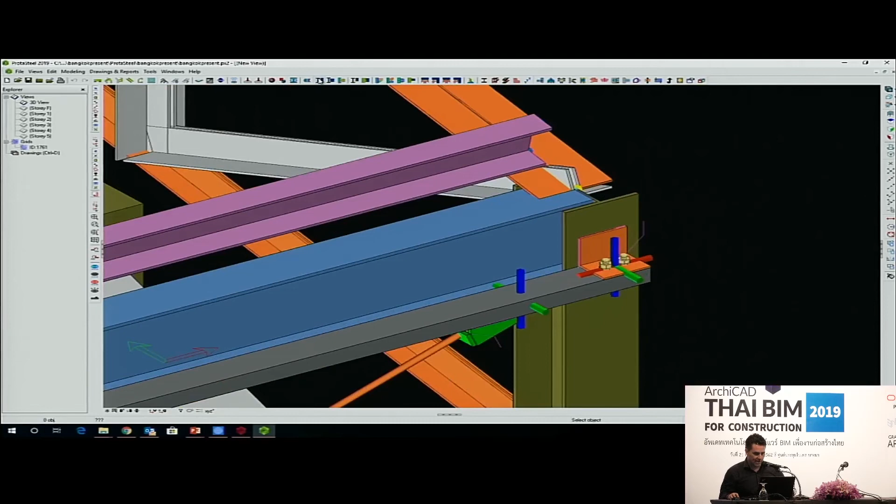Now, if I come to this joint here, maybe I'd like to put in an end plate connection - okay, and that's now done. Underneath this, we're actually doing design, so for a lot of the standard connections in here, we are creating the design documentation, and all the underlying calculations for this connection are being performed. You can see detailed reports here of all the different checks that are being done in satisfying all the code with relation to that connection design.

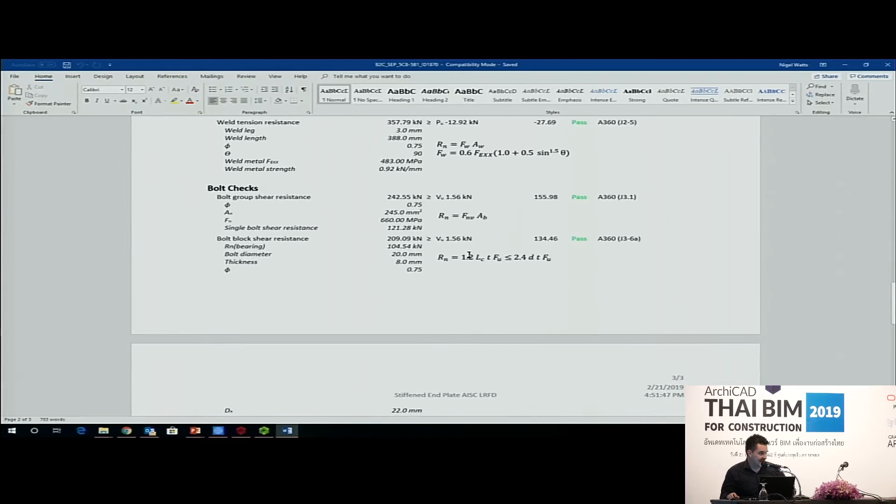So we're doing this automatically as we design the standard joints in here. Now you can probably understand that if I had to detail out this whole model, it would take some time. So what we've introduced with this version is a new platform called IntelliConnect. I can select the model and choose to run IntelliConnect, and maybe I want to quickly detail out all my purlin connections, so I can choose the type of purlin joint I might want.

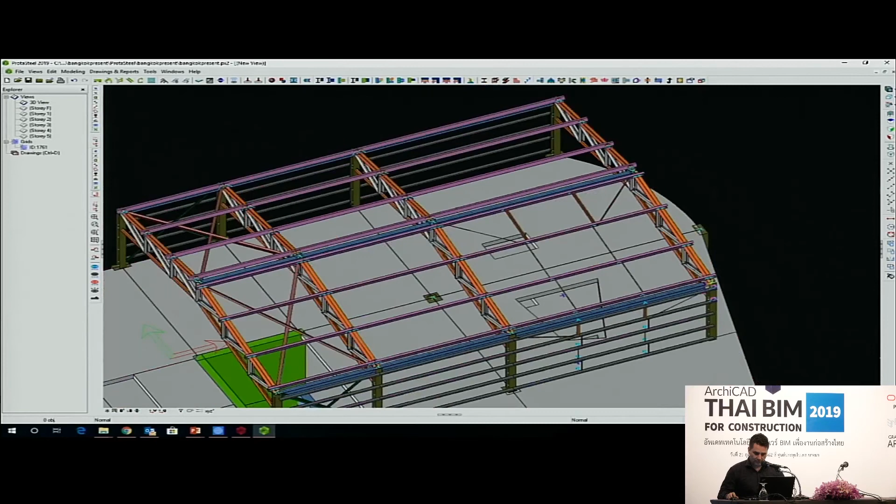Maybe I've got an overhang at the end, and then I can get it to run. So now it's going through and designing all the purlin connections in one go, and if you look at the model here, you might just see that they've all been connected up - all those connections have been made. Maybe I'd like to just select the truss here, and we go to IntelliConnect, and I can run the truss connection design.

So it's going to go through and make all those connections that it can in the truss model. Okay, so that's done, and you can see what's been achieved there. If you come in, you can see that those have been connected.

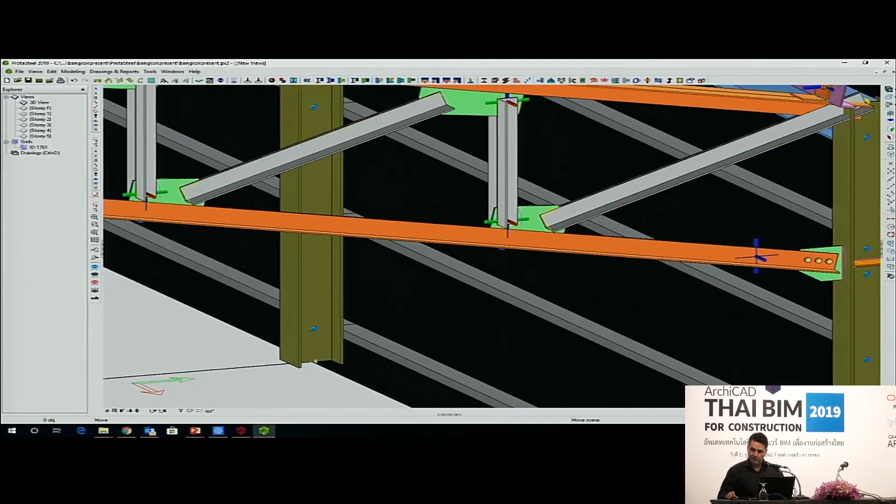Now we do have a few unique connections in here. Sometimes this type of scenario can be quite a challenge, and we have unique connections that can deal with those situations. So you can see I've put another joint in there. Let me just select it so you can see the detail there.

Now these are macros, and if you don't like what it's produced, you can come in and edit. You might see that the bolts there are just sitting up a bit, so I might want to drop them maybe 15 mil below. Okay, and you can see that's now brought those bolts down.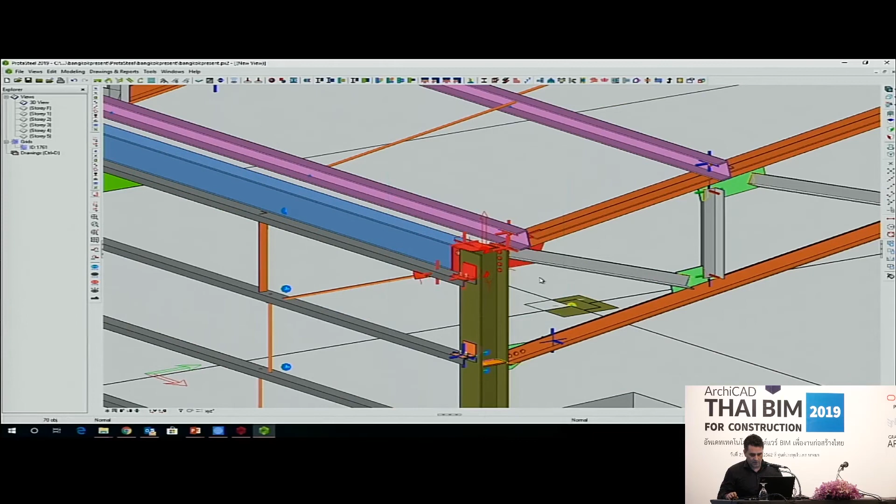Now once I'm happy and I've designed everything, you will then want to come and create your drawings, your details. So in here, I can choose to select what I want to detail out, and we have this little box - it's a magic box - you can come in and choose. So I could call this truss 1, and then select the objects I want in the connection details.

So let's just run around and choose these objects. If I right click there, can you see that there's a box created around this joint? And what this box allows you to do is take different views and perspectives of the connection.

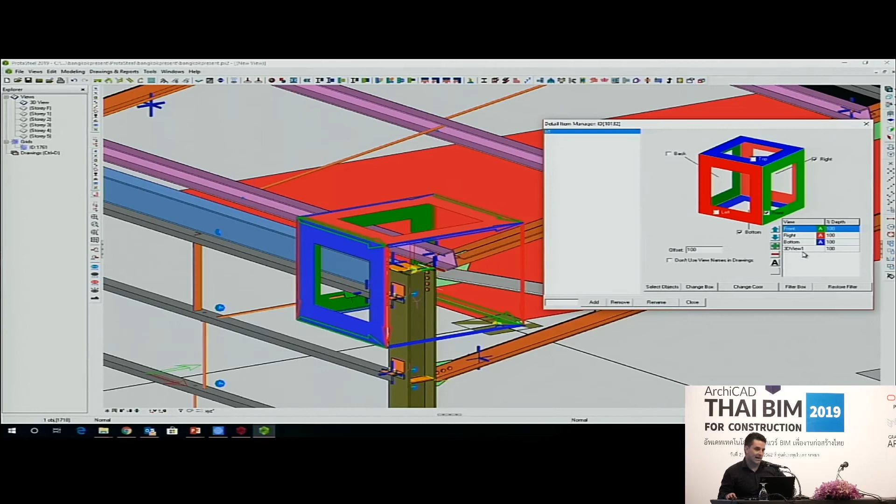So I might want to just look down on top of the connection. I might be happy with that view. Maybe instead of the top, I want to look at it this way. So I can just choose the views I would like to see. You can also have a little 3D view of that joint, if that's what you'd like to create.

So once I'm finished, I might at this point want to create details, and choose different views. I'm going to set up a view of this truss, so you can see I've cut a section through there to create that view. Okay, and we can then come in and create our steel details.

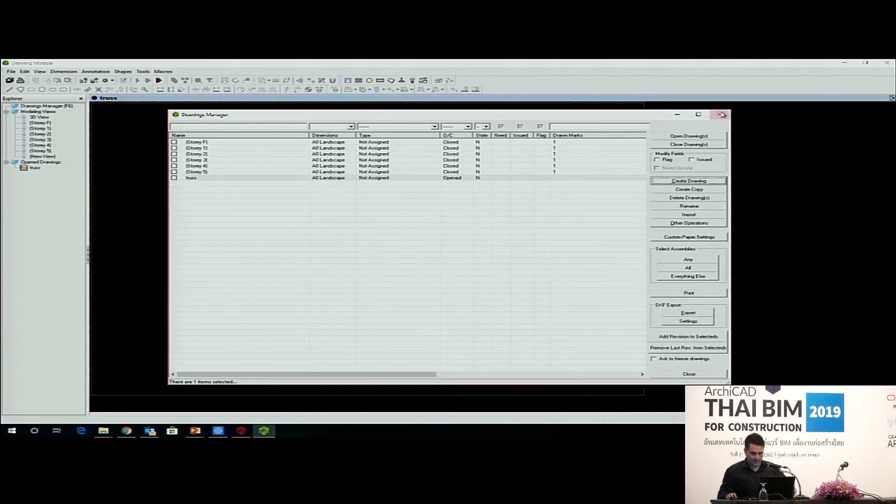So I'm going to create a drawing called truss, and then I'll keep that view. These views are set off across here, and I can see the view of that model there. Okay, and you can see the truss view there.

Now you can work with this once you've done this, dimension things out, and create detailing there. But you'll see this is the connection we created, and there's a box around it. Now if you just click on the box here, it will detail those out for you, so you can see different views of that connection being created.

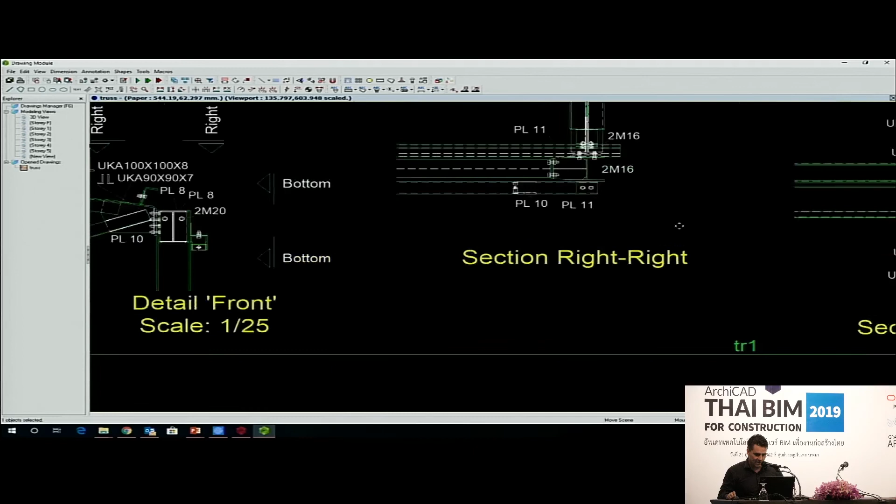A little 3D view, a little perspective here. The nice thing about these labels is that they're all dynamic, so you can move them around if they're not pictured the way you'd like. But the idea is that you can then use these to create different views, and dimension off to show what you want to show within the model.

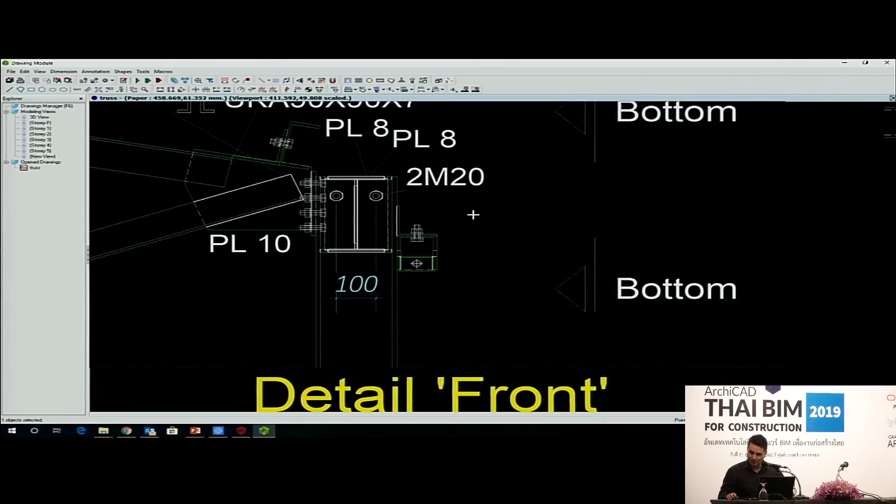So that gives you an idea about how ProtaSteel works. I can actually go right down to fabrication detailing. I can break all these components out, and we can get the full fabrication drawings from this one physical model. Okay, you can have a partial view, but then we can see the whole model here.

Now these can be communicated out. If I want to send this out as an IFC export, maybe you'd like to send it into ArchiCAD, for example, then you can take it through the IFC route.

So that summarises what I just wanted to touch on briefly today. I don't have a lot of time, but hopefully that will be of interest. Just to conclude, we are looking at...

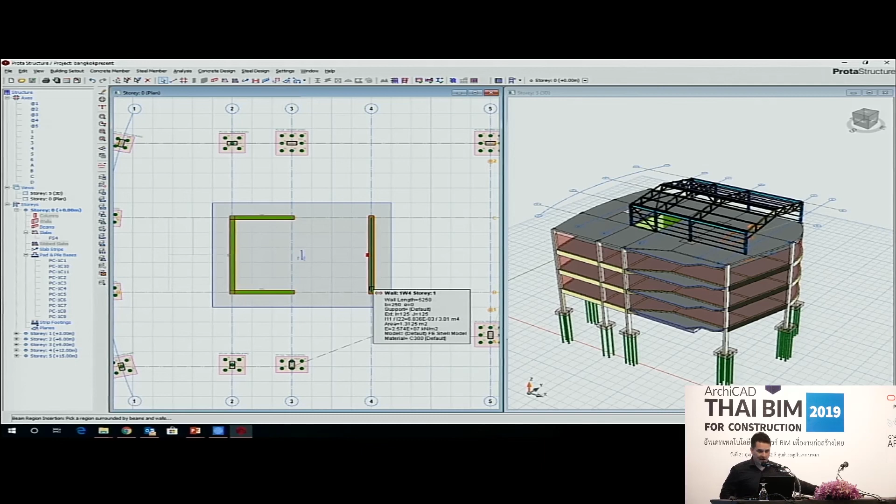So just to conclude, we are looking at releasing the 2019 version, which I've previewed today, and it will be released into Thailand very soon. In a few weeks' time, you'll have it, and you'll be able to start taking advantage of the technology.